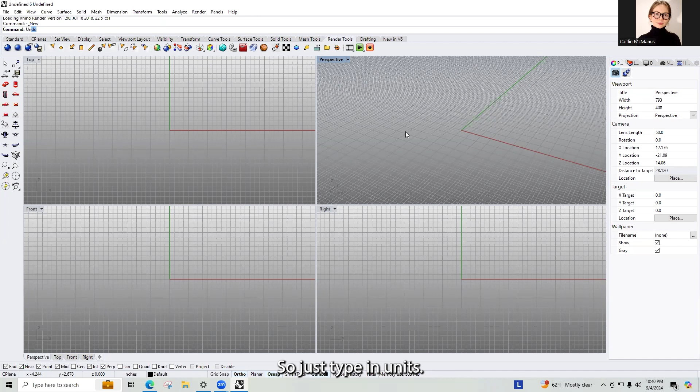You do not need to click in the command bar as we discussed in class. Just type into the keyboard and the software will automatically know what to do. You see the basic defaults are inches and they go to decimal display. I prefer feet and inches just because we work with fractions all the time. It doesn't mean you can't enter decimals for inches and feet, but this is just the way I like to work.

Now what we need to do is File, Save As. I clicked File at the top left corner, and now I'm just going to save this in my designated folder. Everyone's going to have their own folder location, so just save it wherever you feel comfortable.

I'm going to make a new folder here for tutorials. You can create folders on your computer to your heart's content. I'm just going to name this Caitlin tutorial for right now, just so I have a file saved.

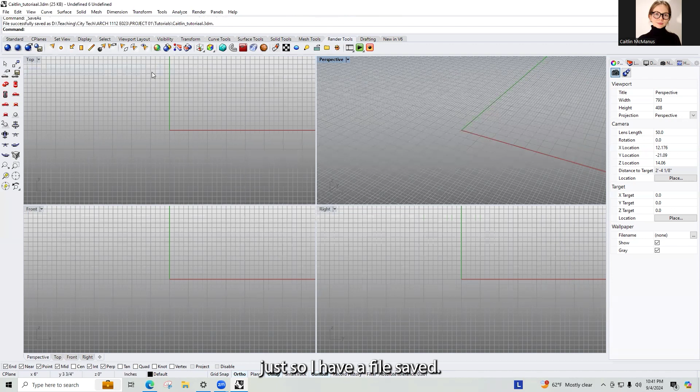Later on, when you're uploading these 3D models for me to review for grading, you will follow the file naming protocol available in the syllabus. If you scroll all the way down, you will see file naming right here. Again, go back to the shared folder, check out the syllabus, and make sure you have everything accounted for.

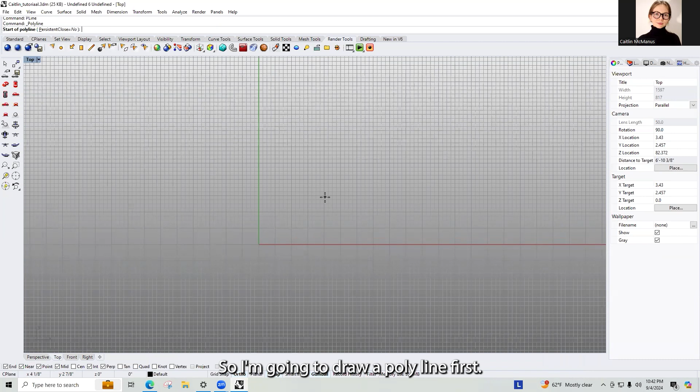I'm going to start in my top view, just like we did in class, and give myself the generic boundaries. I'm going to draw a polyline first, one of the 3 options, and type in 4 inches in all directions. Click 4 inches, click, and then type in closed curve just to make sure I have a closed curve.

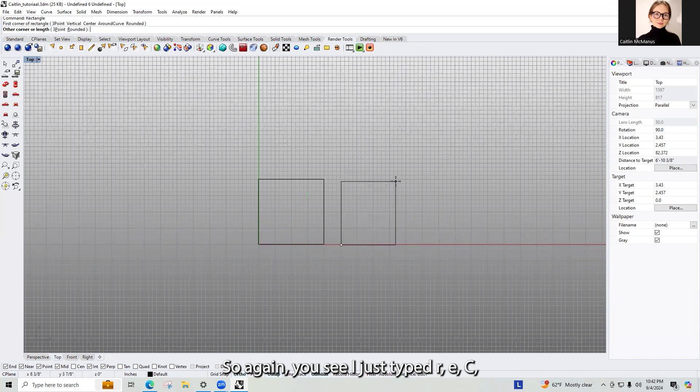What you can also do is type in the rectangle tool. You see I just typed REC, and the program already knew I was trying to draw a rectangle. So I click my starting point, and it prompts me what to do in the top left corner, in my command box. Everyone's command box can be in a different location, and you can always drag this.

I like it at the top. Again, I'm starting my first corner point, then I type in 4 and type in 4, and that automatically generates a closed curve. Typing in rectangle is probably the faster way to do it, but it's entirely up to you.

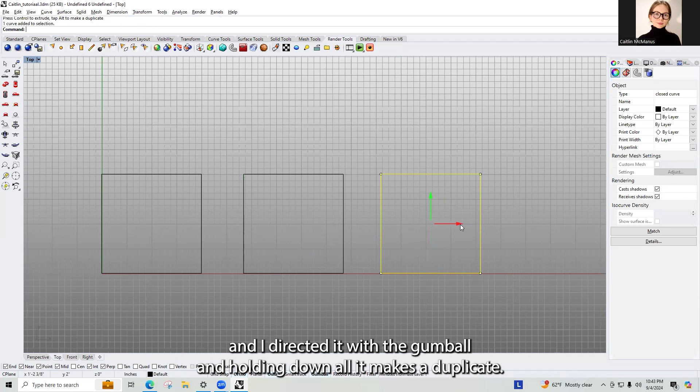So what I did was copy one of these boxes over to the right. The way I did that was clicking on the curve, and I have this gumball tool pop up. I directed it with the gumball, and holding down Alt makes a duplicate. If you do not have gumball visible, you could just type gumball and make sure it is set to O for on. You could also turn it off if you don't want it, but I prefer to have the gumball tool since it makes moving these shapes and massings much easier.

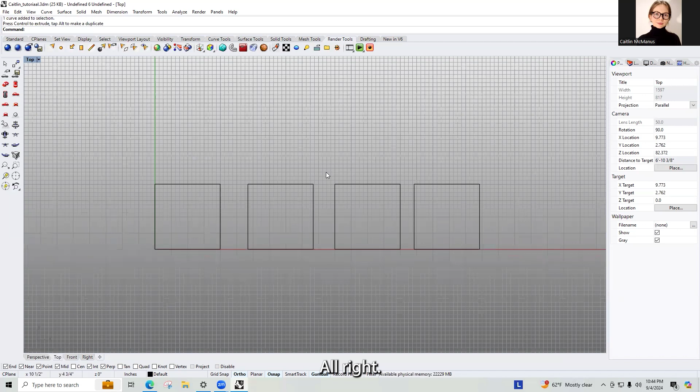I don't have a model here to reference right now, so I'm just going to draw a few basic plan views. You all should have 3 physical models that you're referencing for this first part of the assignment, and these are the 3 models that you just uploaded to the drive.

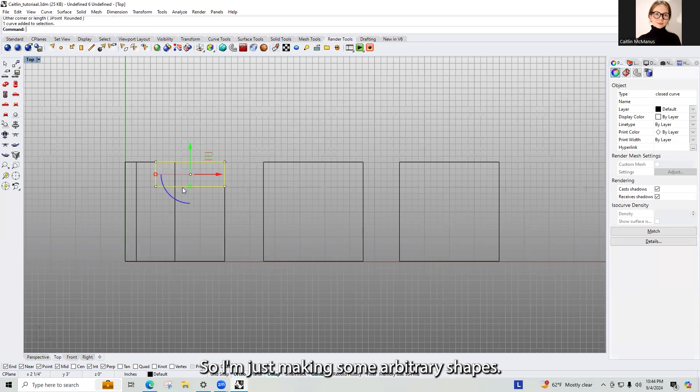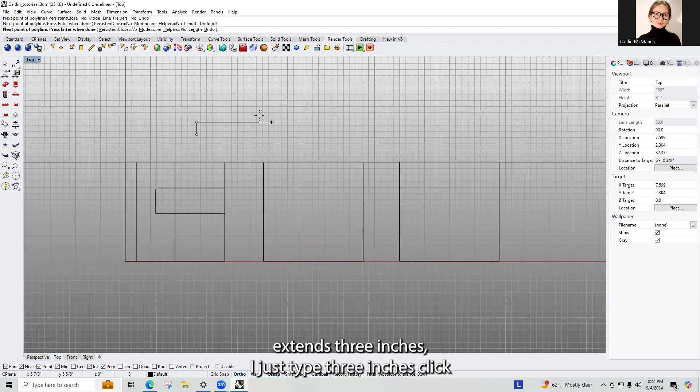So I'm just making some arbitrary shapes. When you're typing these, it's going to be more exact, so I recommend using a polyline. If you know one side of your model is 0.5 inches, which is a half inch, you can type in 0.5 or 1/2. And if this extends 3 inches, I type 3 inches, click, again 0.5, click down, and close it off. I like to make sure I have a closed object, which you can check on your properties toolbar where it shows if it's a closed curve.

Now if I'm drawing just a regular polyline like this and I bring it very close but don't touch, it will say open curve. We only want to work with closed curves for this. So I'm going to get rid of that shape. I did that by dragging a window over the curve and pressing delete on my keyboard.

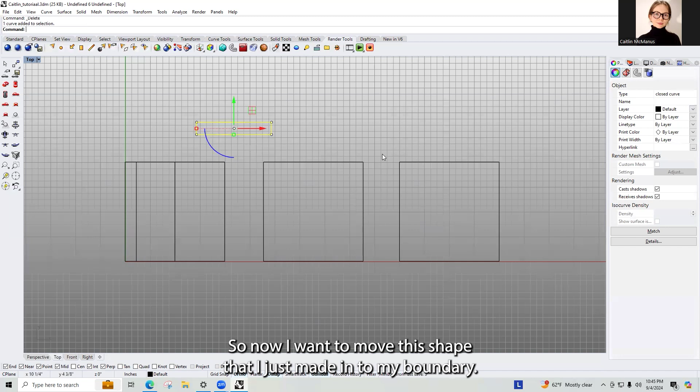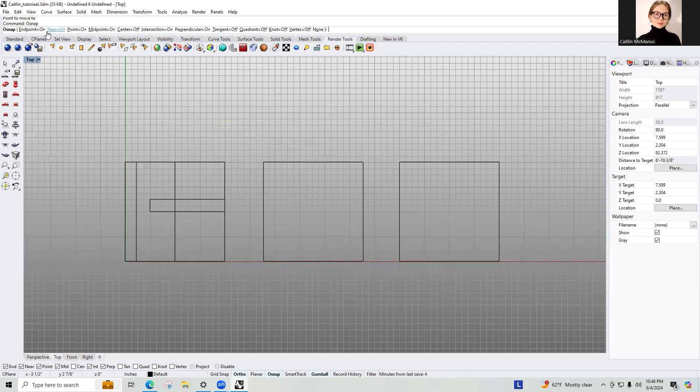Now I want to move this shape into my boundary. I'm going to type move and pick one control point, and it makes it easier if you have your Osnaps on. I have my Osnaps shown on my screen. If you don't see yours, these are just the gripping tools we use when controlling shapes. You can type OSNAP and choose from the command options what you want to show. I have endpoints, near, points, midpoints, intersection, and perpendicular all on.

You can turn them on and off as you please. I like these settings, but as you become more familiar with the program, you will have your own preferences.

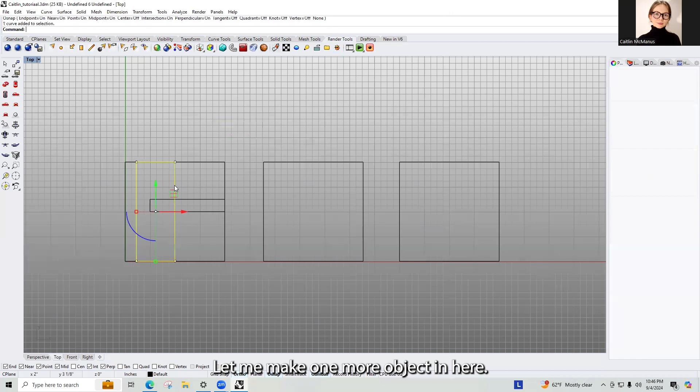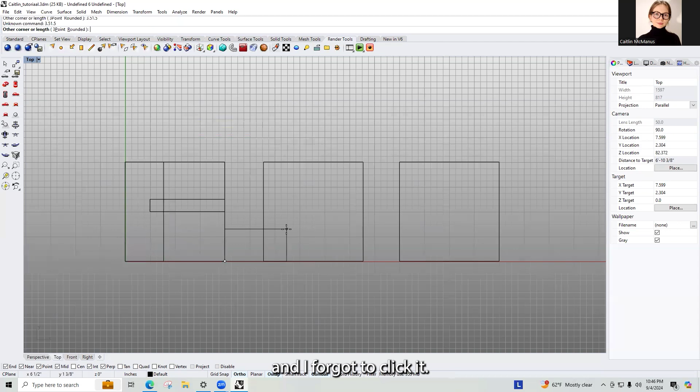Let me make one more object. I'm going to move this aside. Again, I can move it with the gumball tool if I wanted, but I'm just being a bit more exacting. I'll make one more rectangle, 3.5 inches, and then the height I'll make 1.5 inches. Oh, and I forgot to click it, so bear with me. Always make sure you click down first, this way it locks in the dimensions you entered.

So we can do that again: rectangle, first corner right here, other corner length I'll do 3.5 inches, click down, then enter your additional length. I know some of you struggled with that in class, but you'll get the hang of it in no time. Again, we can do this with the polyline tool, same as before, a little bit more exacting, and I'll type close curve just to make sure my two endpoints meet.

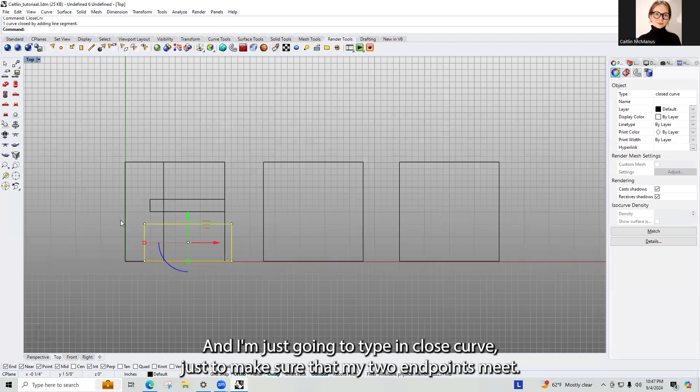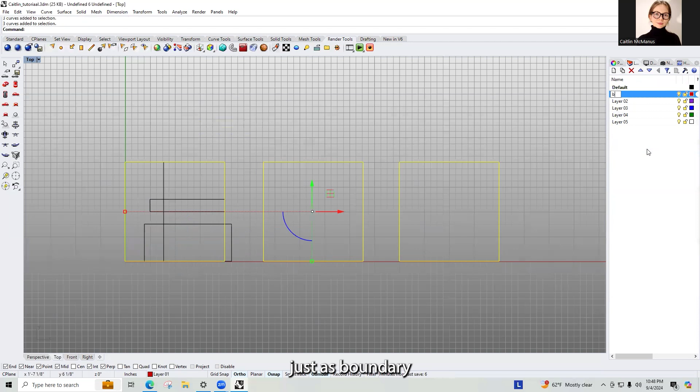Okay, so you see I am out of this boundary. What we might want to do to keep us a bit more in check is change the layers of these boundaries. So I'll change it to layer 1. You can toggle between your layers just like this on the right-hand side, and I'm going to rename this layer as boundary for reference. Now we see that has changed to red to reflect the change in layer.

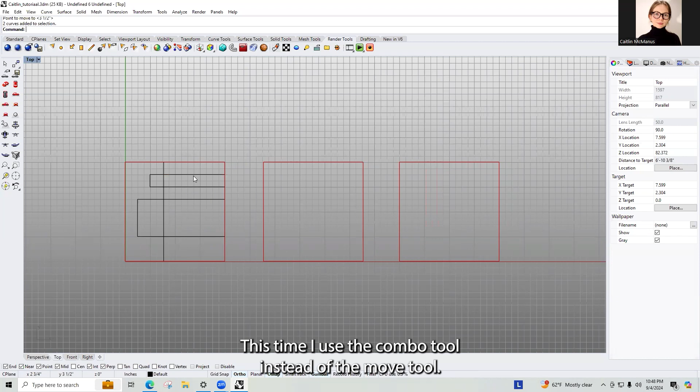So now I'm going to move this rectangle back into the boundary, and I'd like to shift both of these up 1 inch. This time I used the gumball tool instead of the move tool, and that worked out well for me.

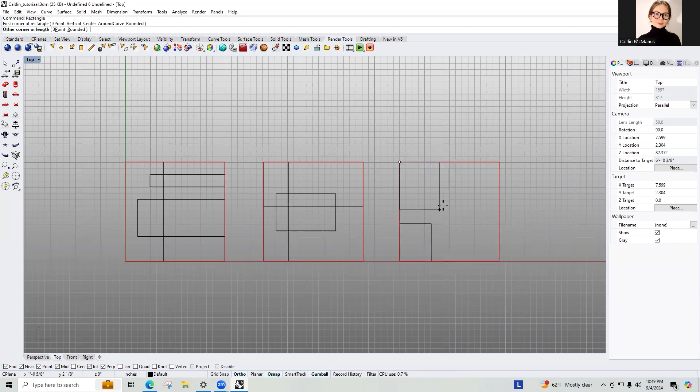Okay, I'm going to make a few more rectangles just to get this assignment moving along. I'm going to move this up 0.5. And over here I'm just going to make this a little different. All of your models by now should be distinctive and have different concepts.

I know some of you have... you know what, I'm going to do something that punches through, because I know a few of you have shapes with holes in the middle of them. So I'm just going to draw a rectangle and offset it, a half inch inward, which creates this inward shape. And then I'll have one more rectangle cutting through that entirely.

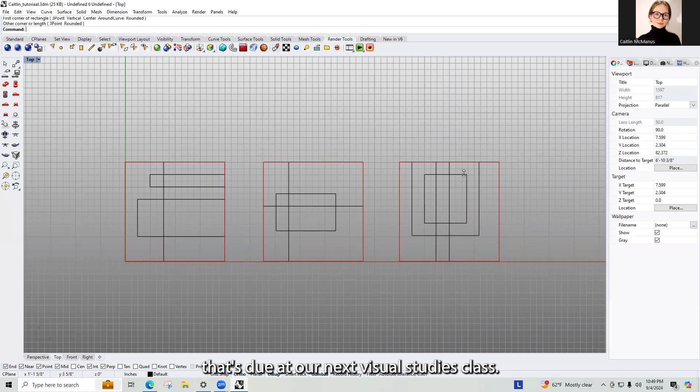Okay, so now I have my 3 plan views, and this is very similar to the hand drawing assignment due at our next visual studies class, the top view of that. So now what I want to do is extrude these curves in perspective. I clicked on the tab that says top, double clicked it, then I see the 4 quadrants, and I double click into perspective.

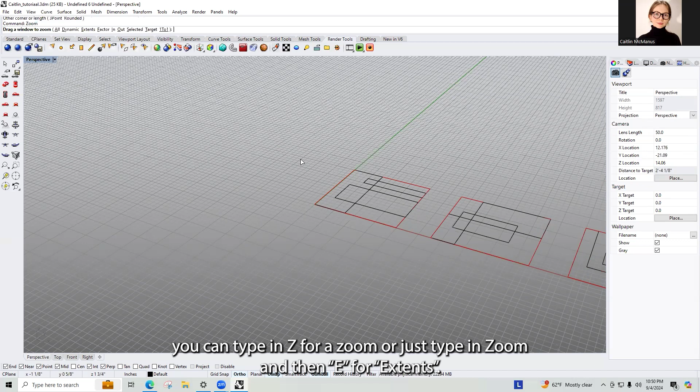If you want to see everything that's within your model, you can type in Z for zoom, or just type in zoom and then E for extents. This shows everything that's in the model.

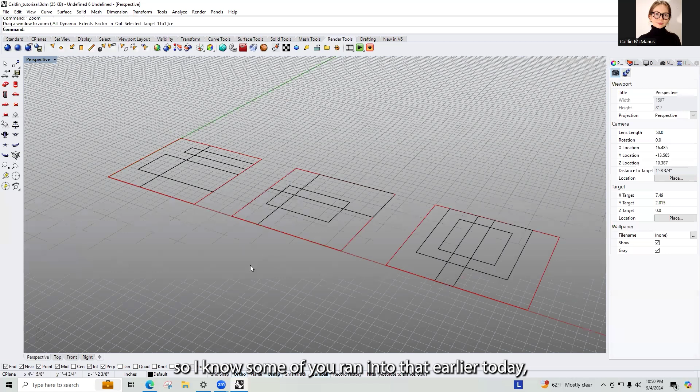If for some reason you end up drawing a rectangle very far away, what you can do is move this rectangle, click a point, and move it to 0,0. This way it's the origin point. I know some of you ran into that earlier today, so this is just one way around that.

Now I'm going to start extruding my shapes. Before I do that, I want to change this to be in a shaded view. This way it becomes a little bit clearer to see what the solid masses are.

I'm going to extrude curve. Now you see right now it's going in both directions and it's also not a solid object, so I'm going to change that by following these prompts at the command bar. I'll type B for both sides because I don't want both sides to be on anymore, and I'll press S for solids because I need it to change from no solids to solids. Now I'm just picking my distance.

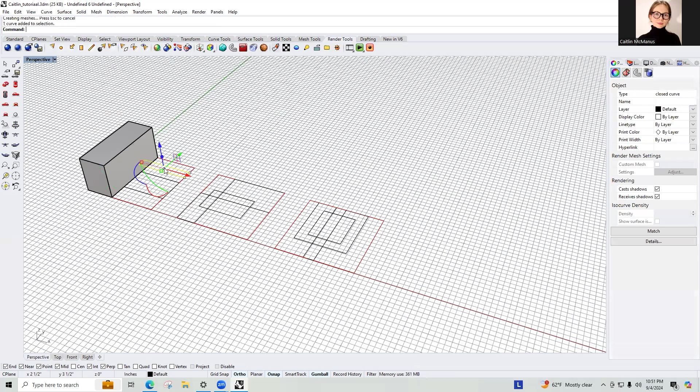This block I will make 2 inches tall. This one I will make 3 inches tall. And this one here I will make 0.5 inches tall, so 0.5 is a half inch.

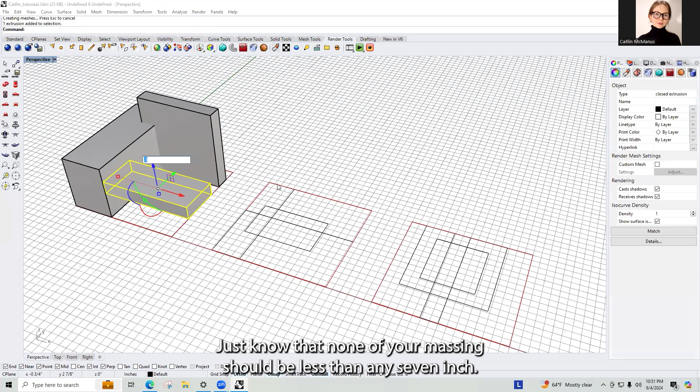If it's a 1/4 inch, then it's 0.25. If it's an 1/8 of an inch, then it's 0.125. Just know that none of your massings should be less than an 1/8 of an inch—it's just if you had some distances between that you would focus on that.

Now I'm going to start elevating this. I need to bring this one up, maybe I'll go up another half inch. Now I have 3 massings—I have this nice cantilever and so on, 3 unique massings.

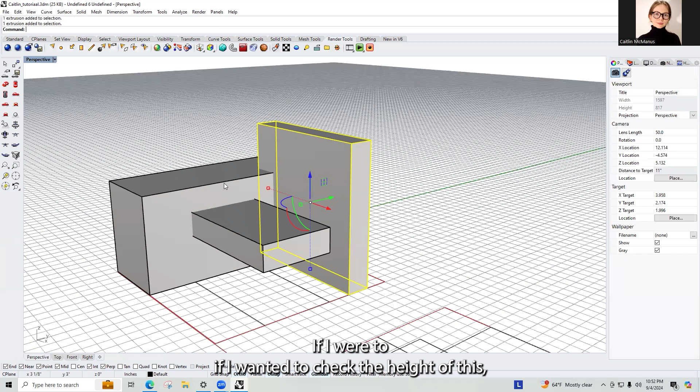If I wanted to check the height of this, I could type in bounding box in the command bar, press enter, and then check the distance—the overall height of this full model is 3 inches. Now I could delete that bounding box because I no longer need it, and I'll move on to the next model.

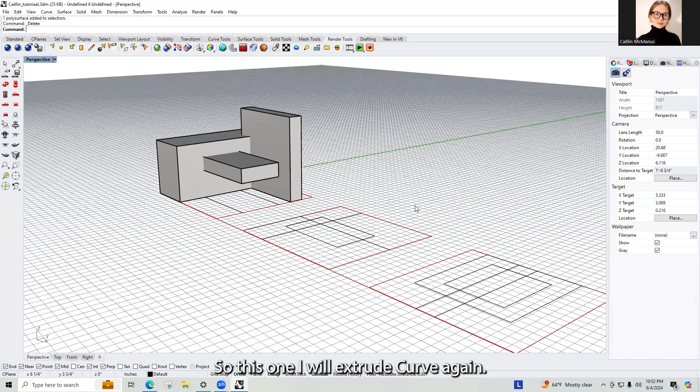So this one I will extrude curve again. It's going to follow 4 inches. Most of the settings stay the same from the previous commands, so because I changed this to be a solid going one direction, it's going to follow that along until I change my intentions.

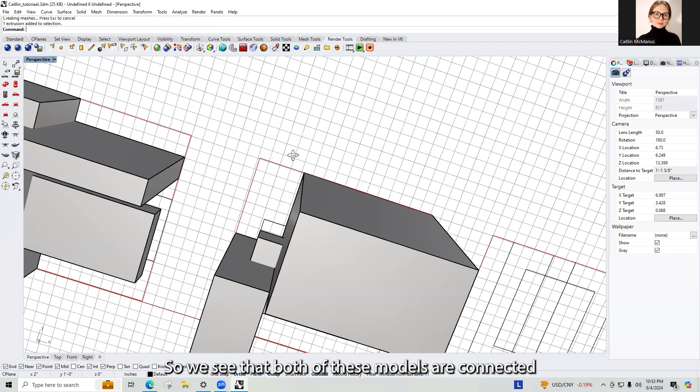If I want this to be extruded 3 inches, I just type in 3 inches. For this last model, I'm going to extrude curve—make sure you type extrude curve because there's a different type of extrude that we're not going to be using. So 0.5 is what I want to do, and then I'm going to lift this up 1 inch. We see that both of these models are connected with this one centralized piece, and we'll move on to the next one.

So, extrude curve. Now, Rhino is super intelligent, so even if you make a typo, it usually can figure out what you're trying to say—it'll give you options in the command bar. So just keep a lookout for that.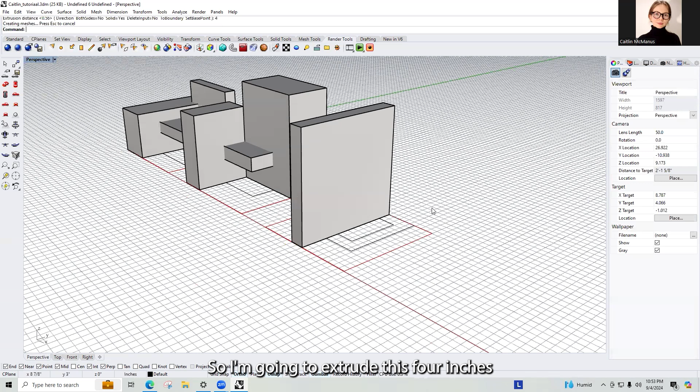I'm going to extrude this 4 inches. Actually, no, I don't want to extrude that 4 inches. I want to start over here. Extrude curve.

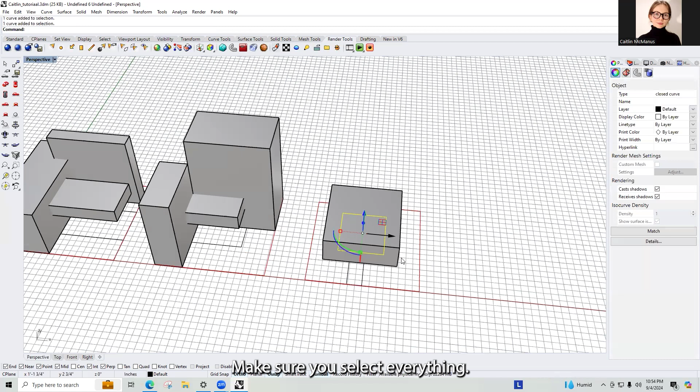I'm going to extrude this one 1 inch. Now I don't see that curve that I had in the middle, so I'm just drawing a window over it—make sure you select everything, try to draw a window that selects that whole shape. And then I'm going to extrude this curve 2 inches, opposite direction.

I'm just pointing my mouse in the direction that I want it to offset, or that I want it to extrude. And now I'm going to lift this model 0.5 inches.

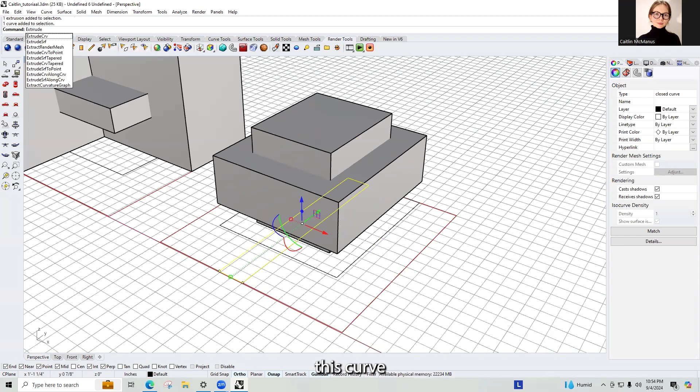Now I'm going to extrude this curve a 1/4 inch, so 0.25. And then I will just lift this up 1 inch. And now I have all these pieces just tucked within each other.

Okay, so pretend these are my 3 physical models that I've already modeled out of the rigid foam from the first part of the section. And I'm just going to make a little copy of it. Again, I made that copy using my gumball tool. I held down the Alt key, and then I dragged the green arrow in the direction that I wanted to move in. Another way that you could do this copy and paste is by physically typing in copy, grabbing your start point, and then moving it to your end point, your desired goal.

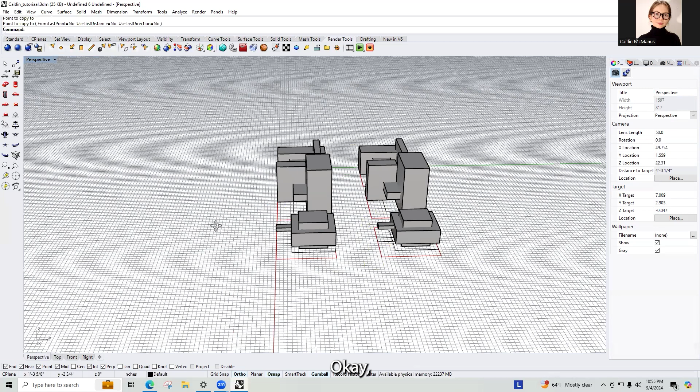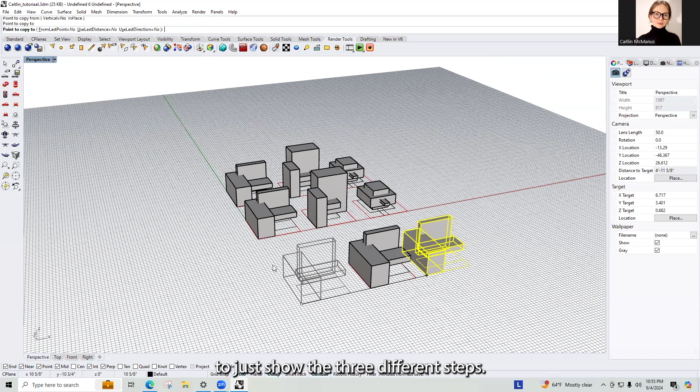Okay. So now I want to pick my favorite model that I'm going to make different versions of. Okay. So this is going to be the model that I choose. And so again, I just copied it using the gumball tool. I can copy it this way to just show the 3 different steps. And what I'm going to do for these 3 different versions is reconfigure these shapes a little bit. So it's slightly different from the original model, but it's following the same concept. So here I might want to shrink this guy.

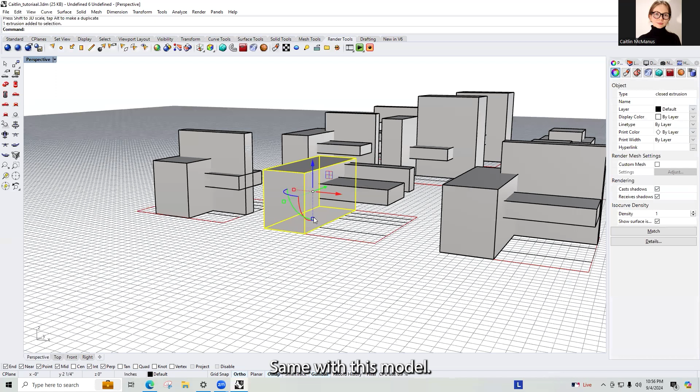Same with this model. If I only want to shrink it in one direction, I use the command scale 1D, and I pick my start point, my second reference point, and then I type in the height that I want it to be. If I only want this to be 1 inch tall, I type in 1, and then it reduces it to 1 inch. You can check this by typing in distance. Click 1 point, click second point, and that'll tell me in my command bar that it was 1 inch.

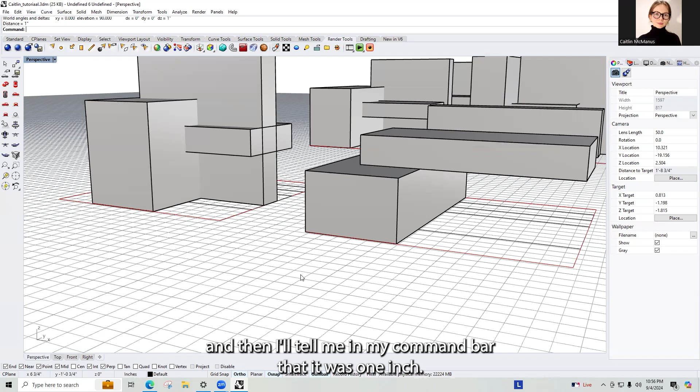Okay. So now what I need to do is drop this shape so that it intersects. So let me move and bring it down just like that. And so you see when I moved it down, because I have my Osnaps on, it tells me when I make this intersection. You see it says end, INT. So that's a direct reference to the Osnap rules. So now this object, I think I'm going to scale it 1D as well. And I will just bring it to the base of this 1 point. Okay, so you choose reference points, reference tools.

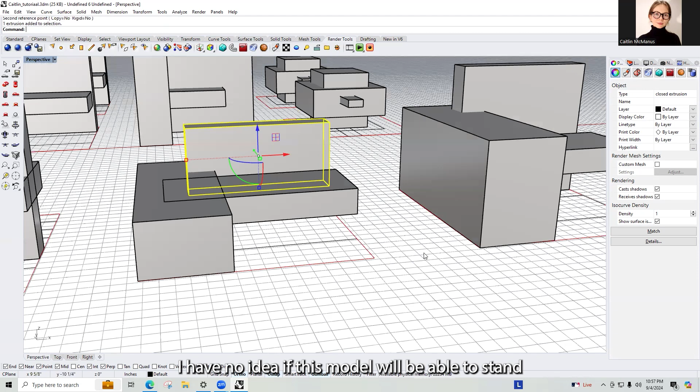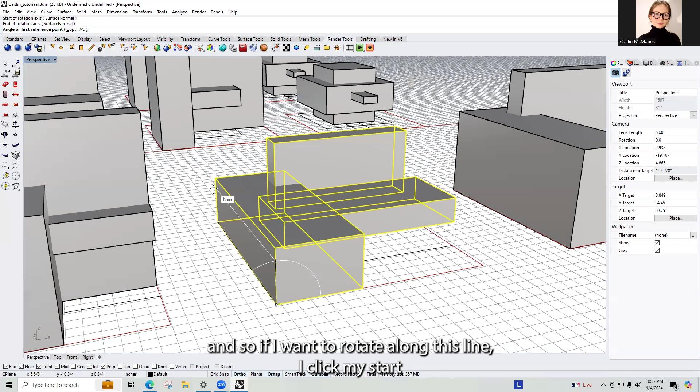I have no idea if this model will be able to stand in this way because it's not a physical model yet. So it could be that these 2 pieces weigh it down. And if that is the case, maybe what I do is I rotate this object 3D. And so what I'm going to do is rotate it along the vertical axis. So I pick my axis of rotation. And so if I want to rotate along this line, I click my start point, end point, and then the direction that I'm planning on rotating. So if I want this rotated a full 90 degrees, that works. And then I'm just going to shift it back into the boundary. Okay. So that was rotate 3D.

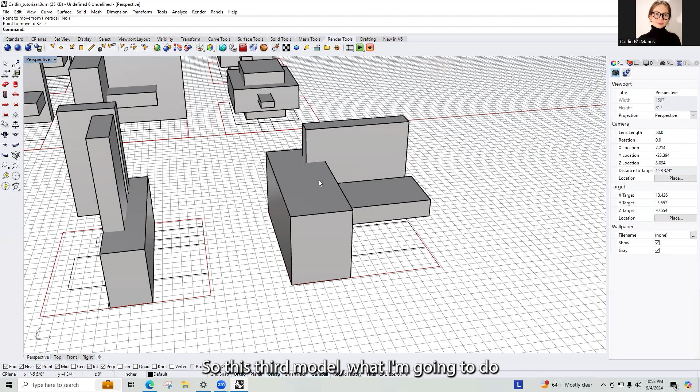So this third model, what I'm going to do is shrink this one. So I'll scale this 1D, start point, end point, bring it to the edge of this one model. And so I'm using this model as my reference point. And this one I might scale 1D in the opposite direction to let it favor this side. And maybe I'll scale it in the opposite direction so that it intersects this piece. Okay. So now I have 3 distinctive models, and they were all inspired by my initial physical model. And now we're going to move on to actually cutting the models.

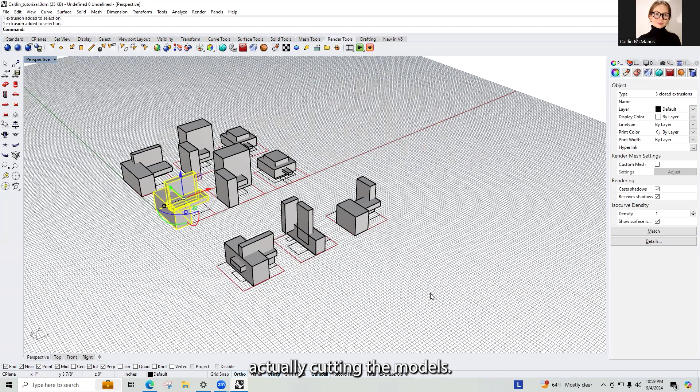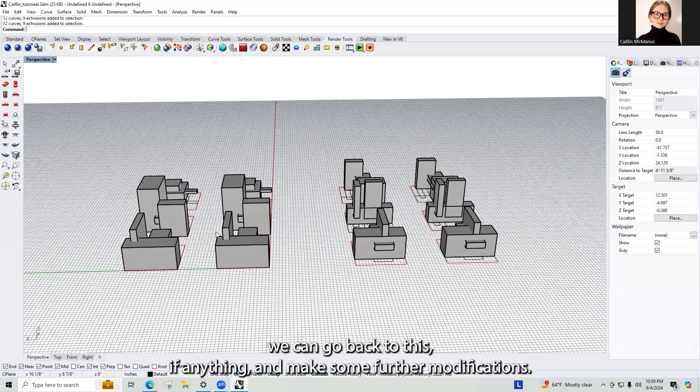So this one I'm just going to copy and paste. I typed in copy, and now I'm just choosing the area that I want to paste it. So just keep in mind that I am intentionally keeping duplicates, just so that we can go back to this, if anything, and make some further modifications. So this is a great way to see the evolution of our models and our designs. And it also helps us back it up if something were to go wrong.

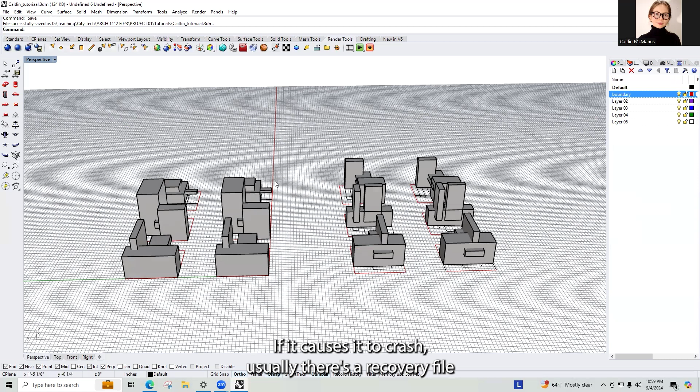Speaking of, I'm just going to do a quick Control+S save, just in case I type in a command that requires too much energy from my computer and causes it to crash. If it causes it to crash, usually there's a recovery file that we could resurrect the work from. But it's very important to do these frequent saves. All right, so just because I know that these are the models I'm working with, I'm going to lock the layer of that boundary, and I'm going to change the layer of some of these objects that I'm leaving alone as is without trimming.

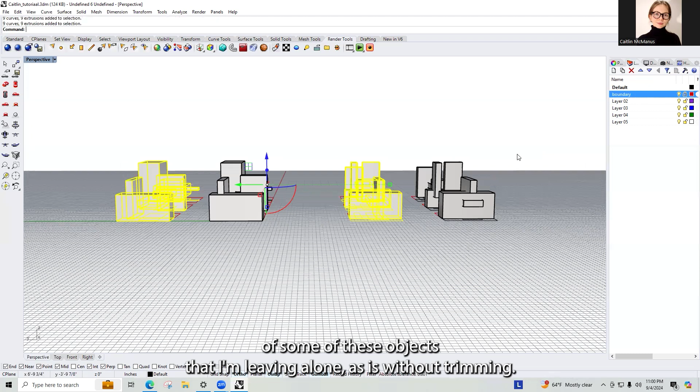So I'm just right-clicking from the Layers tools. Again, you're probably in Properties, change it over to the Layers tab, right-click, and change Object Layer. All right, so now the objects that I'm not going to trim are purple. So these are original, okay? And then the remaining objects that are still in the default layer, those are going to be trimmed.

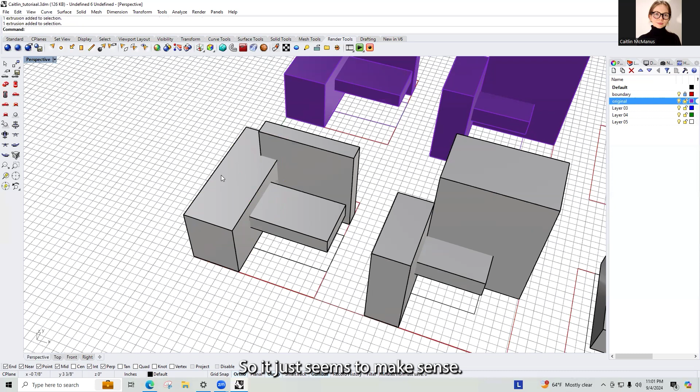All right, so we started going over this in class, what the Boolean trim or the Boolean split tool does, and it's basically just cutting out some of these intersections. So for this first model, I'm going to cut from this base. This is my dominant form, so it just seems to make sense. So I'm typing in Boolean split. All right, so this is the object I'm splitting, and this is my cutting tool.

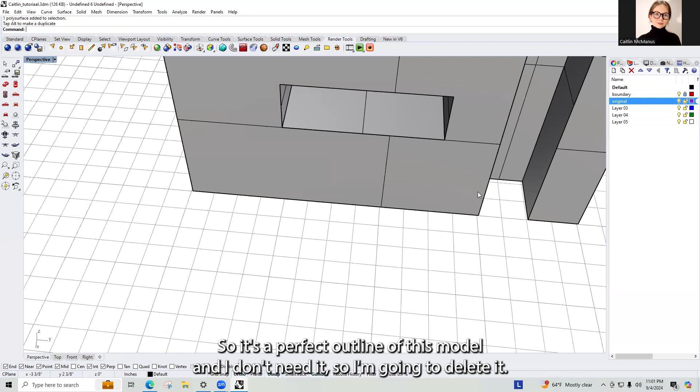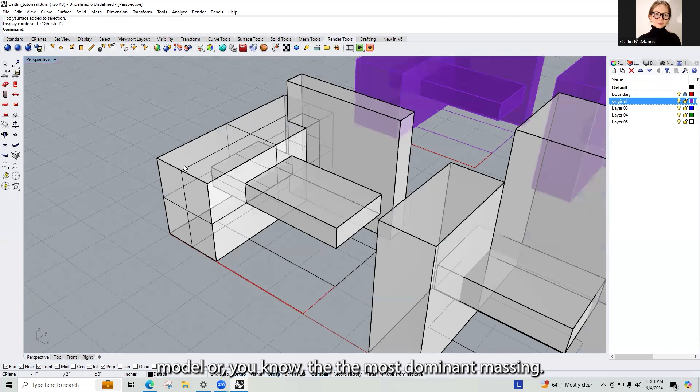So now, just for reference, you can leave it alone, but we see that I truly cut through this one dominant piece. All right, so it's a perfect outline of this model, and I don't need it, so I'm going to delete it. I just wanted you to be able to see it. So if I went into a ghosted view in my display settings, you can see that there are additional lines. We're seeing through this as if it's an X-ray. So we see the massing puncturing the base model, or the most dominant massing.

And yeah, so I'm going to go back to shaded view. Just keep in mind that each of these views you can work in, but it's a lot more demanding on your computer. So I recommend just sticking between shaded and wireframe. But as you get stronger computers later on, you can try out other things.

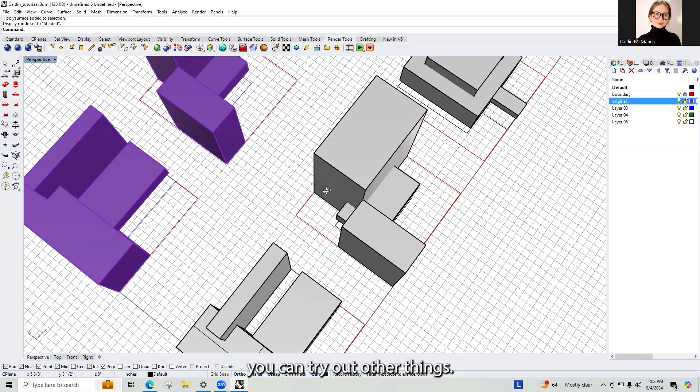So the two pieces here and here are what I want to trim this next time around. So I'm going to type in Boolean split again. And so I want to cut this one and that one. Okay, so I selected the two objects that I want to cut. This center one here is going to be my cutting tool. Right click, and now I see that this object was cut and this object was cut. So if I were to pull this box out, it would make way for this box and that box.

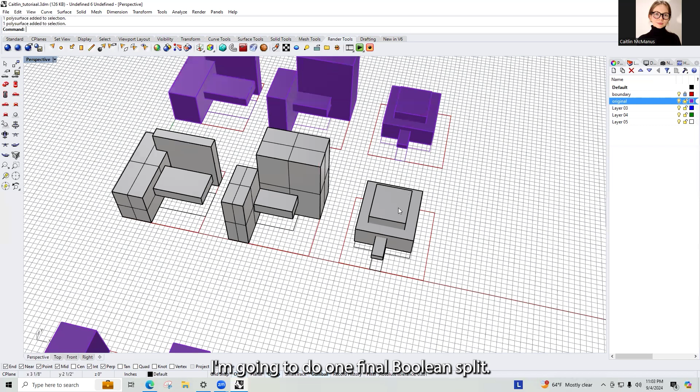Okay, this one's a little bit more complicated because I cut at a corner, but I don't think any of your models have that, so I'm not too worried. Okay, so moving on, I'm going to do one final Boolean split. And so I'm cutting this object. I'm going to use this cutting tool, and now I have this object right here with a pure opening.

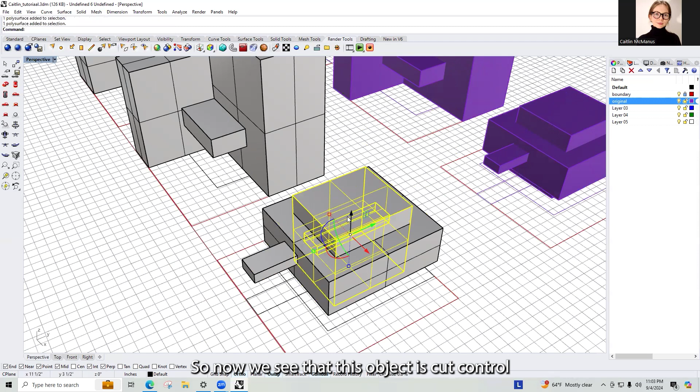Okay. Now I'm going to cut both of these tools with this one intersecting object. So now we see that this object is cut. Control Z to undo that. This object is cut, and we're going to do Control Z, put it back in place. And this one is its full form, no cuts.

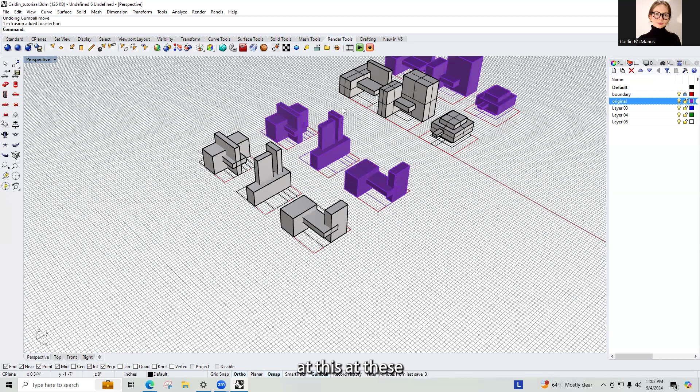All right. So now we're going to go on to our Boolean split tool at these variations. So Boolean split, and it's going to be cut by both of these objects. And same thing here, I'm going to cut this one base with both of these cuts here.

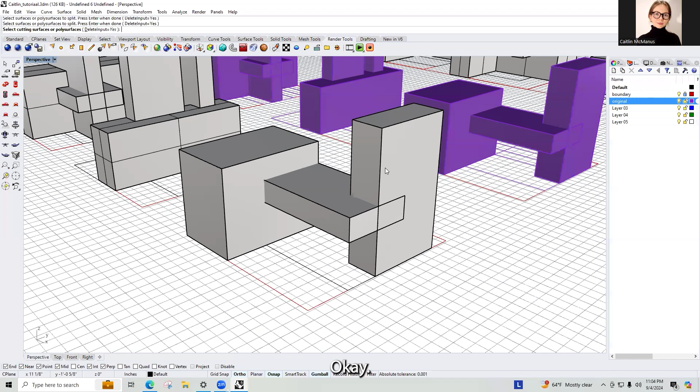And last one, Boolean split, I'm going to cut this object and that object. You see they're selected in yellow with this, undo that. Sorry. Type that in again, Boolean split. This object and this object both are going to be cut by this centerpiece. Okay, so we see a full cut here, we see a full cut there, and we're good to go.

Okay, so we no longer need this little center box just because that's our split. And so I'm grabbing my final cuts and I am moving them down. Oh, let me unlock my boundary so that I could copy this as well. So copying this, hold down Shift to select multiple objects at once. And I'm going to copy and I will paste it right here.

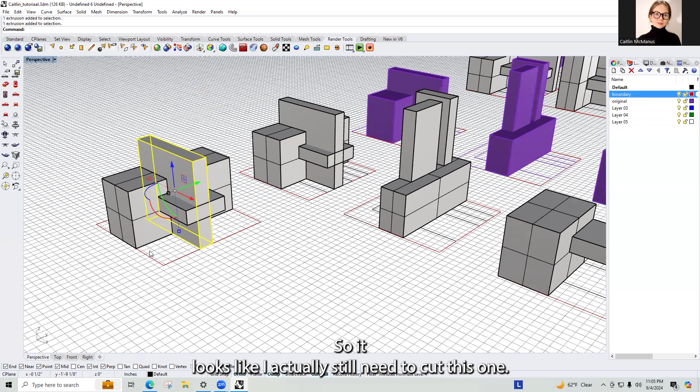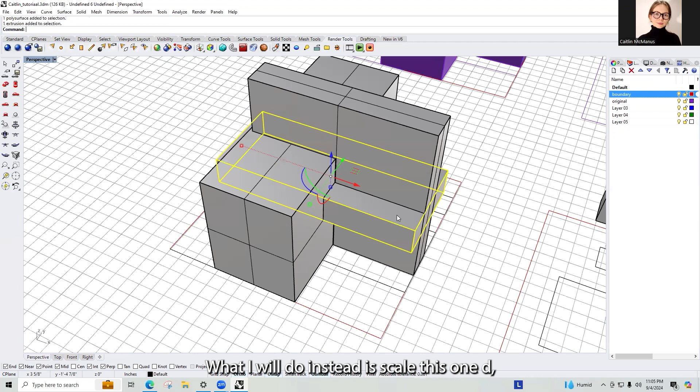All right. So it looks like I actually still need to cut this one piece. So let's go back to that. You'll notice this as you're working. It's very easy to miss things, as long as we get back to it and get it resolved. So now I'm going to split this shape with this object and that object. Tolerance is too complicated, so that cannot work. So that's fine. What I will do instead is scale this 1D. I will just reduce this object.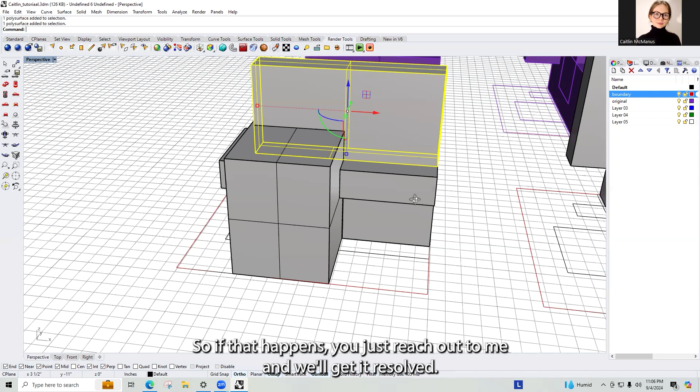Oh, it seems like it worked anyways. Yeah, it just cut it into 4 parts, which is not what we want to do. So if that happens to you, just reach out to me and we'll get it resolved, or you can just modify your design, just so that it has to be the 3 pieces, not 4 pieces. But just for this demonstration, I'll leave it alone as it is. Everything else seems to be okay.

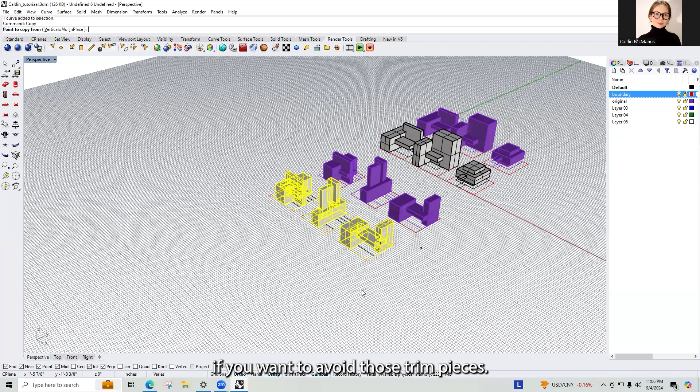All right, so again, I'm going to copy these models section by section, just to make sure that only the pieces that I want are copied over. You can do them all at once if you'd like. I would not use a window because remember, the trim pieces are still going to be there. You can use Boolean difference if you want to avoid those trim pieces. But I think it's nice to see the objects that we cut out. That's personal preference. You might not agree, and that's okay. But I think it's nice to see what was trimmed like this. Okay.

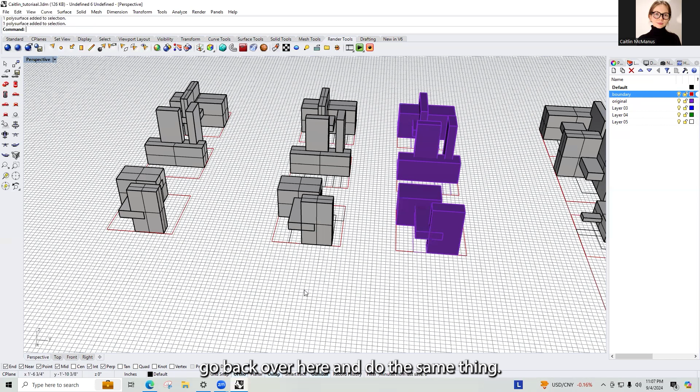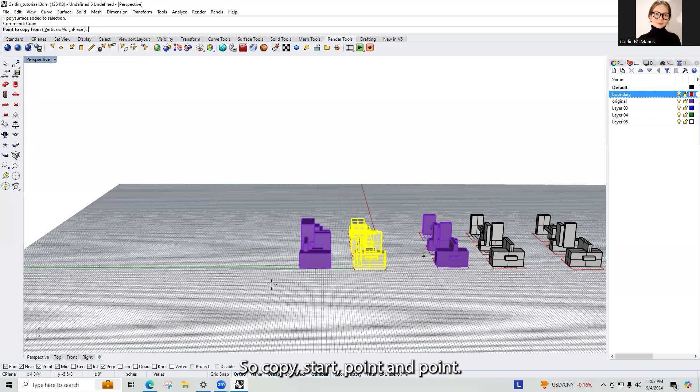So now I'm going to go back over here and do the same thing. I'm not going to draw the full window. I'm going to click my boundary boxes, and just click the objects that are the final objects, not the sum of what was cut, or not the difference of what was cut. Okay, so copy, start point, end point, and now I have these assignments.

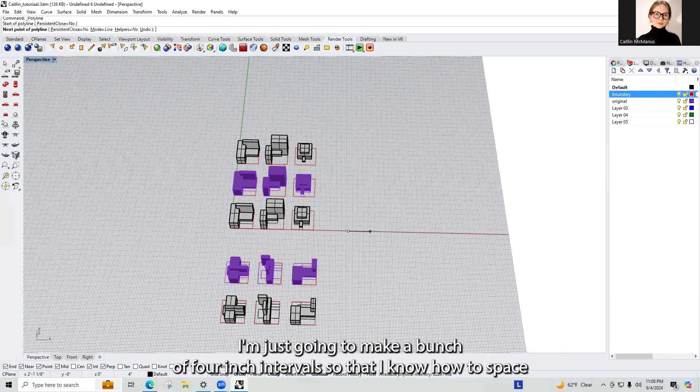So just to clean things up, I would like to make these all in a nice clean grid. So I'm going to draw a polyline to guide myself. If I know that I have 6 objects and they're 4 each, I'm just going to make a bunch of 4-inch intervals so that I know how to space it, where I'll go 4 inches and then 2 inch and then another 4. This is just acting as my guideline. I'm going to copy this 4 inches, then offset that 2 inches, and then copy that again 4 inches. Again, I'm using the gumball tool and the Alt key on my keyboard to get this done.

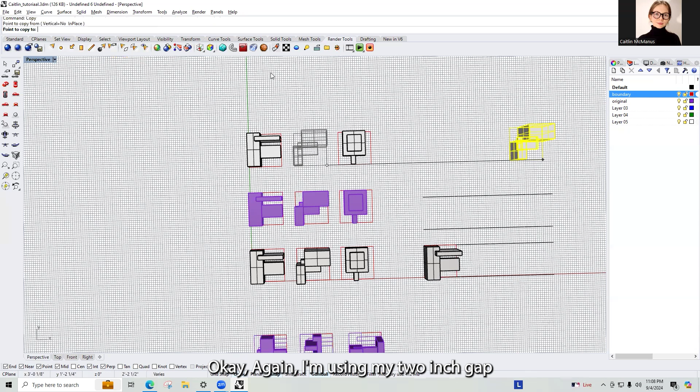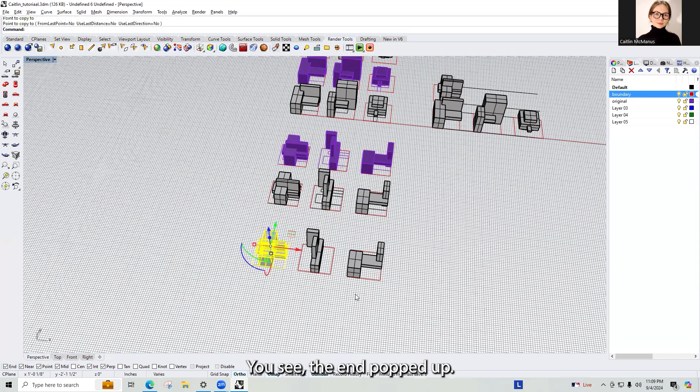So now that I know that I don't have any of the straggling pieces, I'm going to copy each of my objects into place. Okay, again, I'm using my 2-inch gap between the models. Oh, I made an accidental copy. And same here, I'm going to copy this whole section, copy 1. I'm looking for my snap. You see the end popped up. Okay. So these are the 6 models that we need for class.

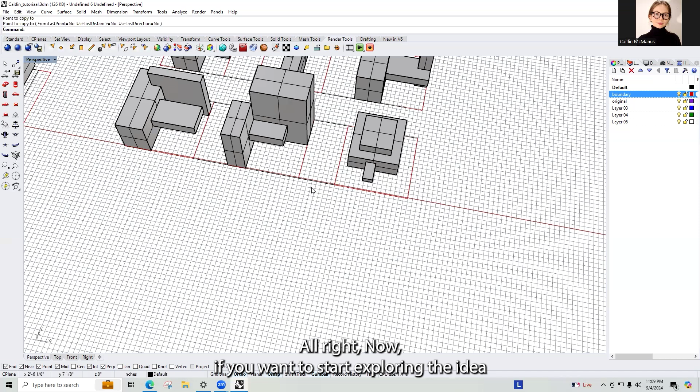All right, now if you want to start exploring the idea of annotating these models, you could just get into a new layer, double click it to rename, and type in dim for dimensions. Now I know that I'm in this layer; I double clicked into it and you'll see that it's the only one that's bolded. I'm going to type dimension. My first dimension point is going to be here, second one there, and I can see that that is 4 inches.

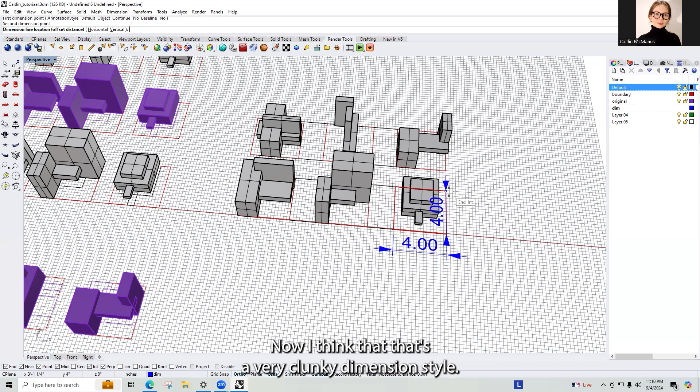Now, I think that's a very clunky dimension style. So what you can do is change it in your settings under linear dimension. Right now it's default. I'm going to change it maybe to inch fractional, and I can change the overall height of these. So 0.025. Okay, my units are a little wonky. I think maybe it was better by 0.125. No. Anyways, you're gonna keep playing with this until you're content. And then remember to change the arrow sizes.

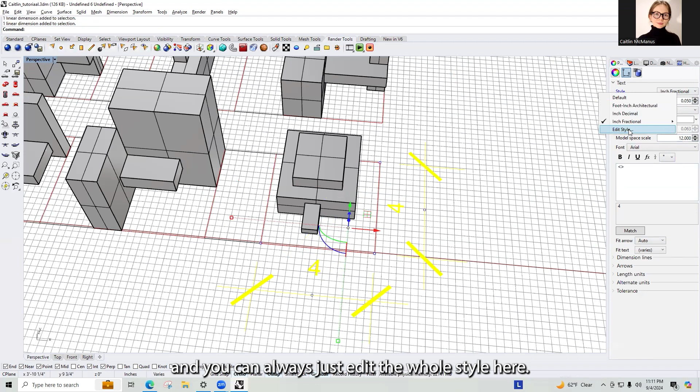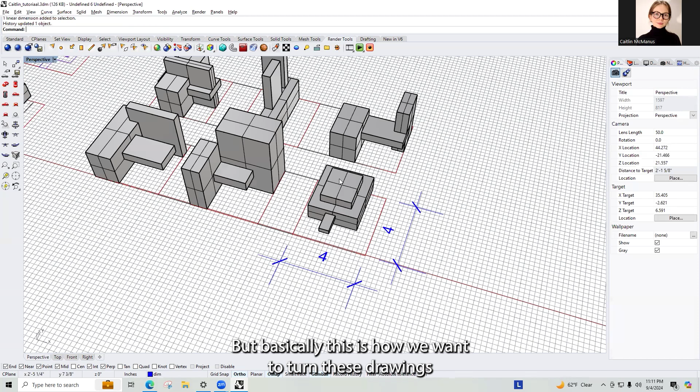And you could always just edit the whole style from here. You do not have to get into this. This might be a little too complicated, so just focus on your modeling for right now. You can play around with that later. But basically, this is how we want to turn these 3D models into drawings.

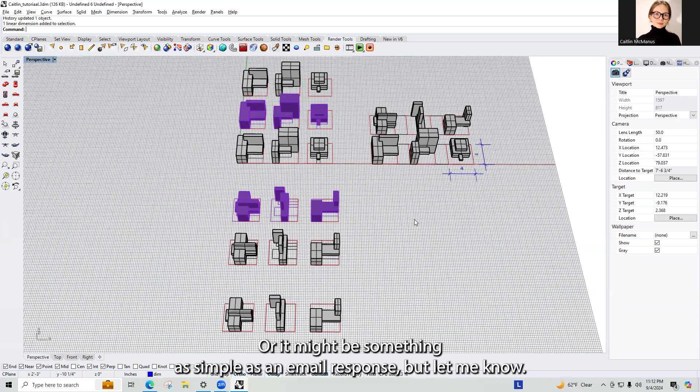So yes, if you have any additional questions, please reach out. If it's a good question that I think everyone will benefit from, I can do another tutorial to solve specific issues, or it might be something as simple as an email response. Send me an email, and do not forget to upload your 3D model to your student folder before class on Tuesday.